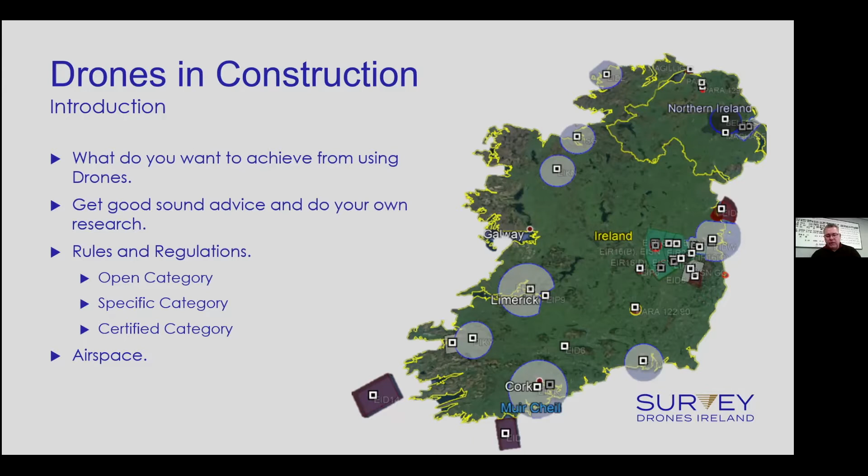The other side that everyone keeps coming about is data protection and GDPR. Look, as I always say, GDPR and data protection works both ways—it's not just one way. It'll never be just, let's say, the individual coming up to you and saying, 'hey, what are you doing taking a picture of me, who gave you permission to take a picture of me?' There's a two-way stream with data protection.

Just on GDPR—during the drone instructor courses or training courses, we only touch on data protection, we only touch on GDPR. Realistically, you should go down the road of having proper legal advice when it comes to data protection and GDPR.

The different categories we're dealing with at the moment are the open category, which is subdivided into A1 and A3. This course is done online, and you need to do it—any drone you have, you must complete this online course. If the drone has a camera and the ability to capture data, under the new EASA rules it clearly states that drone must be registered. You're registering yourself more so than the drone itself.

Once you do that, the A1, A3 category course is free and online. It's €30 to register your drone, and then after that you go and do your A1, A3. Then if you want to fly closer to people, within 5 meters of them, you need the A2 category, and again that needs to be done through the training schools.

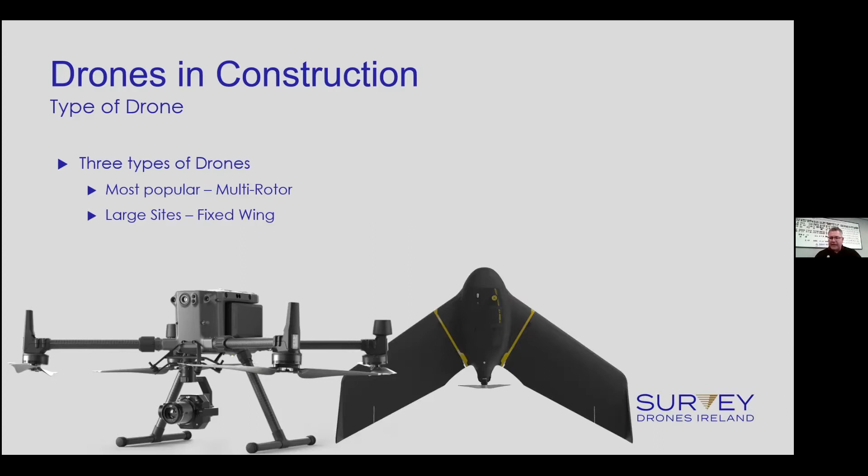The difference between the multi-rotor and the fixed wing is you need kind of like a landing strip for the fixed wing. You don't technically need a landing strip for the multi-rotor. She goes up to where she is and comes straight back down. The fixed wing has to come in at an angle. Now, even though the angle is very steep, you still have to have at least 50 meters by 50 meters at a minimum. The multi-rotor can take off and land inside the construction site very, very easily, whereas you cannot take off and land inside a construction site with a fixed wing. Fixed wing, technically speaking, not good for you, okay?

So you're kind of saying to yourself, okay, right, that's exactly what we need. And then she comes back and she lands. Now, I have great experience of all these three aircrafts. I like every single one of them. But with the VTOL, there's something unique about it going up, transitioning into a fixed wing, and then disappearing into the horizon. And I don't mean that, but you know what I mean? You come back and you collect it, and she comes back into land. Remember, visual line of sight at all times. That's most important. Okay, so that's roughly the type of drone that you're looking for.

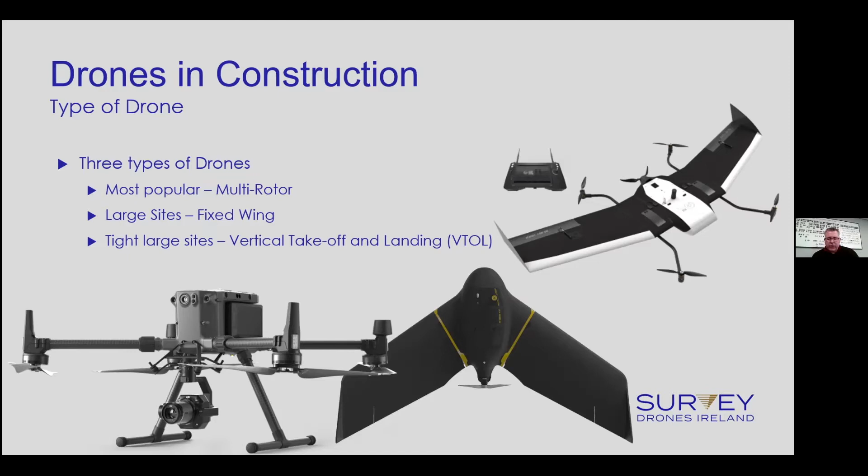Now, as I say to you, you may not be willing to spend money on the drones because each one of these is quite, I won't say expensive, but they have a lot of money behind them. So you need to say to yourself, okay, what are we going to spend straight out?

Don't go cheap, I can't stress that enough. So when you are looking to do this whole drones in your construction site, you need to go in, all in and fully commit. So training is the most important factor here, it's that simple. Training is in my book very, very important, because what happens is a lot of people go down the road of training and they just go, yeah, we'll get the training, we get the course done, the 2-day ground school course, that's fantastic. And then we go off and we get a flight exam and then we're quite content with that. And then, do you need actual flight training? No, we're okay, thanks very much.

And that's where companies let themselves down, right? There's no point in you just getting half the product. Go all in, commit yourself and say, right, let's go down the road of training. Now, I know that's kind of a sales pitch, and I know it's come from school and that's everything else. But no, deep down in my heart, I really believe training is so important. A lot of people let themselves down with training, okay? So the 2-day ground school is something that we offer. The flight training we then offer, and then the flight exam. Now, I cannot stress this enough. The flight training, there is the core ability for you to be able to fly safe, okay?

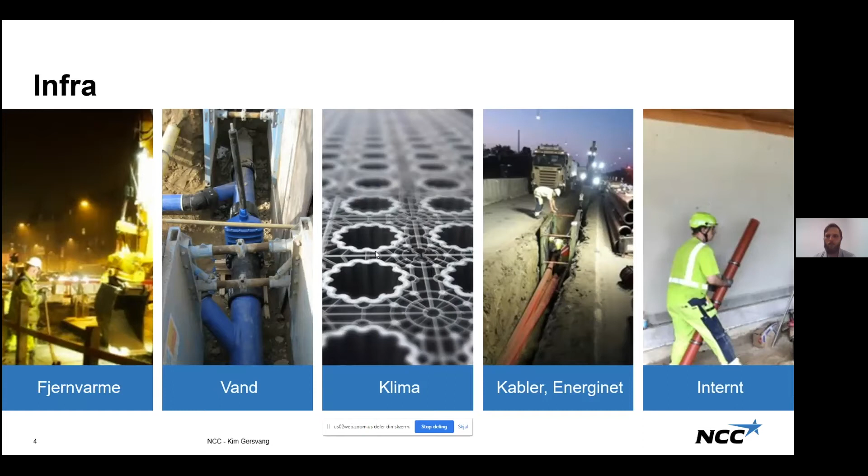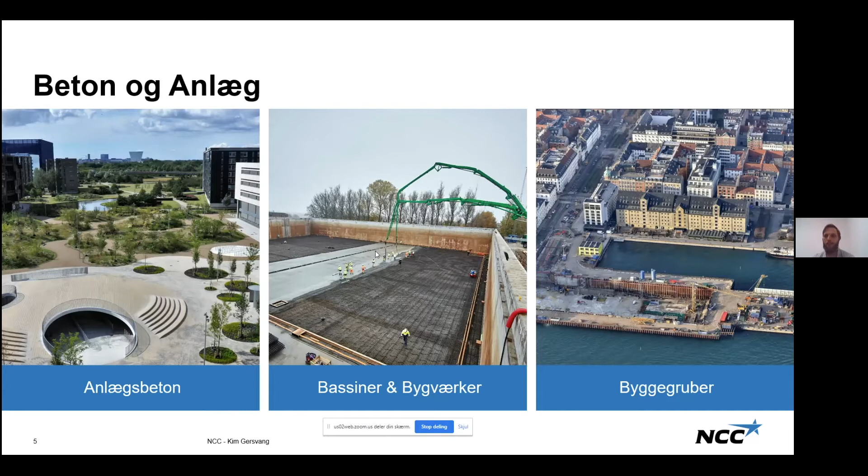Specifically in my small department, civil engineering Denmark, we have 2 main business units: infrastructure, which is district heating, water, climate change preparation, all kinds of energy; and our concrete or civil works department, which is where I do most of my work—all kinds of concrete, like this beautiful school here on the left, basins for fresh water, construction pits, and this one in the middle of the harbor. All kinds of things, we do a lot.

So we got started with drones in 2015. It was my good colleague who saw an opening because he was sick of paying the bill for the small propeller airplane that came over the sites at 200 meters and took a small picture, and he paid a fortune for that. So he went to the boss of the site and asked, maybe we should buy a drone and take over this ourselves. So those two pictures on the right are actually from his presentation after he purchased the drone.

And when they started doing this work, what they were doing was a very low bar - five minutes before their meeting, they sent up the drone and took a picture, then printed it on a small A3, and brought it to the meeting. And already there, it was huge value, because having a straight out picture of how reality looks five minutes before you go into the meeting is the best.

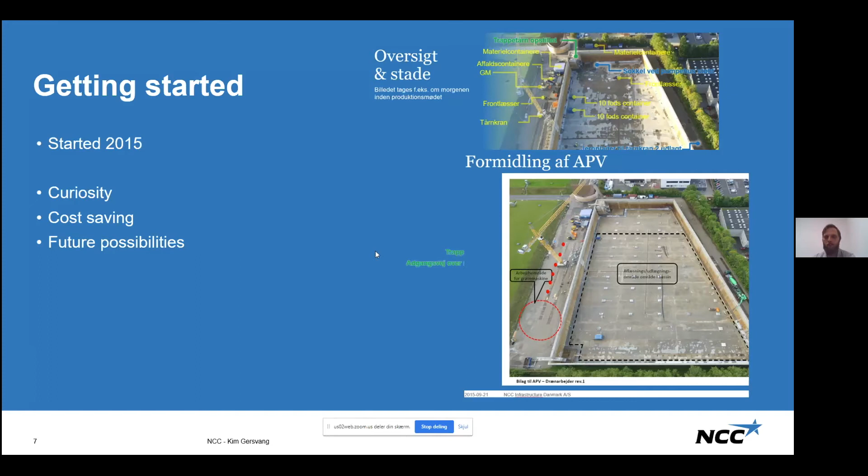So from a purely cost-saving perspective, they already won with the drones. Slowly we realized that there was a huge potential in working with these drones. And one of the first things we bought was Pix4D, which is a great tool, and we still use it.

And we started buying more drones. We started out with a Phantom, DJI Phantom 3, which is old by now, and we went on to buy Phantom 4 Pros, which is still one of our main workhorses. And we started doing all our quarries, all our industry divisions, all asphalt and all components you need for that. And we started doing pretty much all new larger building sites that are not in very restrictive areas, like next to helipads in the city and stuff like that.

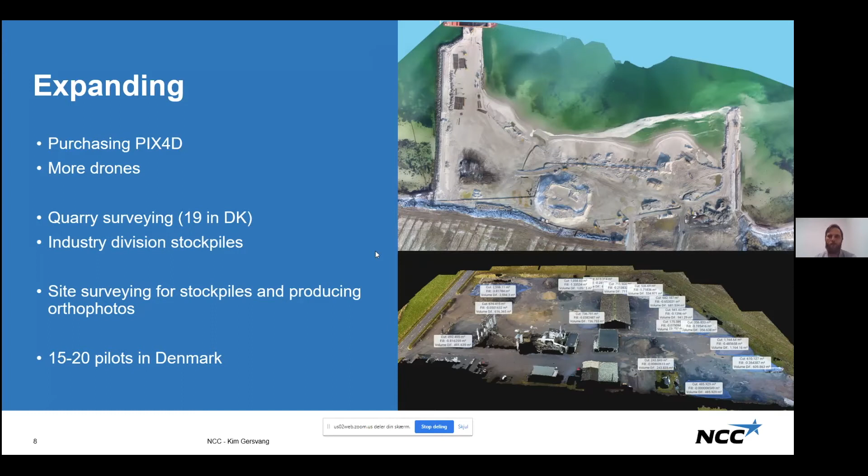And over the years we lost a few employees not long ago, so I'm not sure if we still have 20, but we at least have 15 in Denmark and many more in the Nordics.

And then what we had was fairly accurate within one flight. So we had the accuracy of measuring our stockpiles and everything in good internal quality - like we had a 2%, I think, volume inaccuracy. So how do we get this better?

We want to see how our sites develop. We want to measure everything basically. So how do we do that?

We upscale. We start buying GNSS rovers to put down ground control points. And for those who don't know what a ground control point is, it's just a known location in the world that the drone can take a picture of, and then we have that interconnect between the drone's location and its location in the real world.

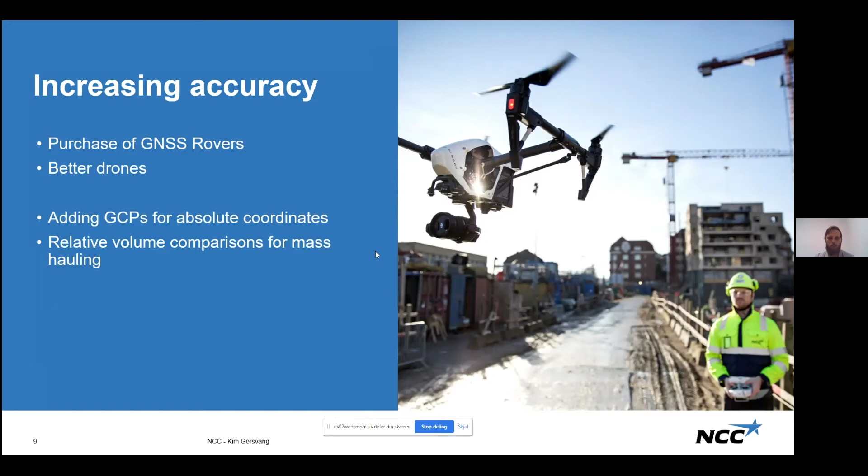And we started buying even better drones. And specifically for our spotlight today, which is a fancy new hospital in the northern part of Zealand.

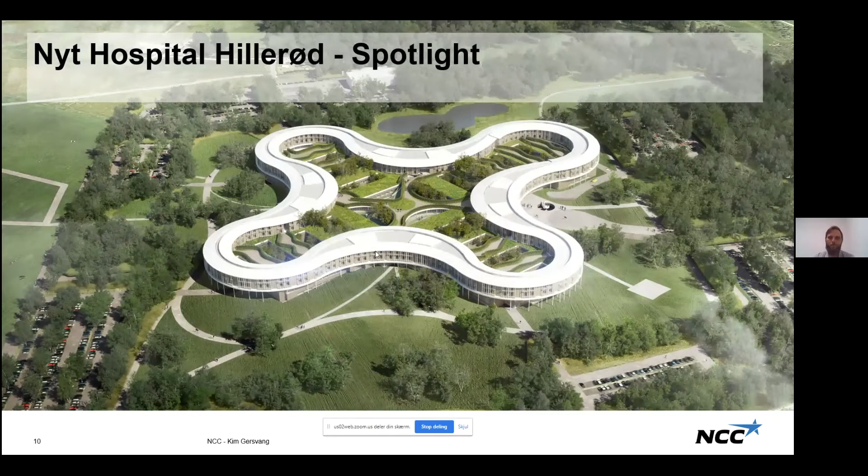We went out, we can take some numbers first. It's a 600 million euro project, 120,000-ish square meters, 570 patient rooms, and a total of 4,000 rooms with all the technical rooms and laboratories and everything.

I'm not gonna try saying that name of the Swiss architect, but they did a collaboration with the Danish architect team, and we won the bid in mid-2019.

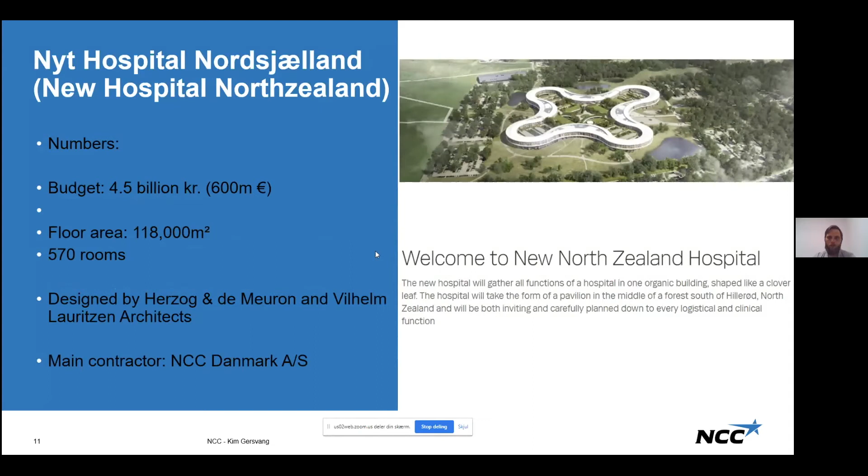It's gonna continue for three more years until it's done with the fit out stage. So for our - let's see if this will start. No, never mind.

We had a goal on the hospital, and it was to improve our accuracy as best as possible. And we wanted to do frequent flights because we know we have a much better hand in the negotiations if we have more data than the others.

So what we went out and did is we bought the very same drone that Wayne was telling you about, the Phantom 4 RTK, which is probably one of the best low-cost drones you can buy, basically. And we went out and bought a subscription also to Wayne's competitor, which is Trimble Stratus, using the propeller platform. And we fly what is called PPK, post-process kinematics, which upscales the GPS quality of the pictures, making for much more accurate measuring and surveying.

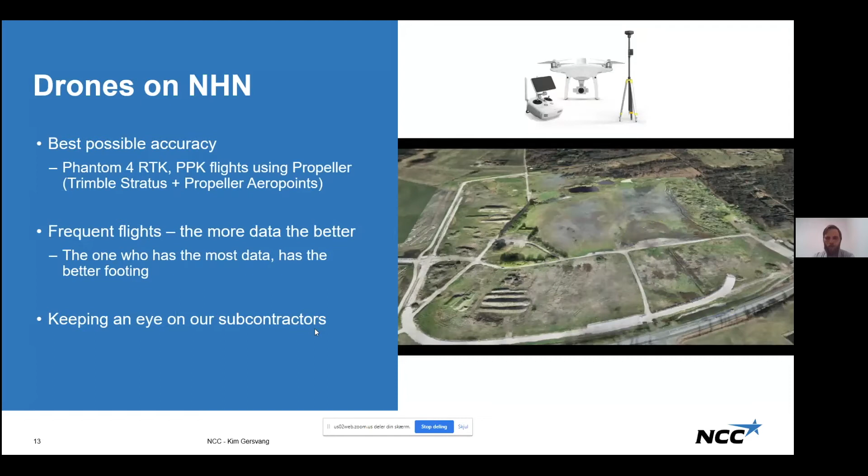And we fly every week, at least once a week. And because we know the more we have, the better - joint venture with one of the bigger earth movers in Denmark called Varslund, which are known to be a bit cheeky sometimes. So the more the better.

When we started on the site, this is a picture from Friday, I think. And you can see there's already about 15 measurements on site from that survey.

When we started, we hadn't actually sold the product to the site. We just bet that they would want to buy it, so there was little to no interest in the beginning. It was pretty much us starting to collect the data. The first ones to move on it were the surveyors, because they run around out there all day, and if they could get an accurate reading in the program instead of wandering.

All 700 meters to the other end of the site, then they would do that. Today we have 70 daily users just in our own organization, and we've sold it to both our subcontractors and the building owner.

I saw statistics the other day that we had more than 3,000 unique logins in the last 6 months, so we have a lot of activity. They use it every day. I can't walk through the office without seeing it open on at least a few screens, just because they're checking something, doing a small measurement, or checking an area for how much they need to order for next week, or things like that.

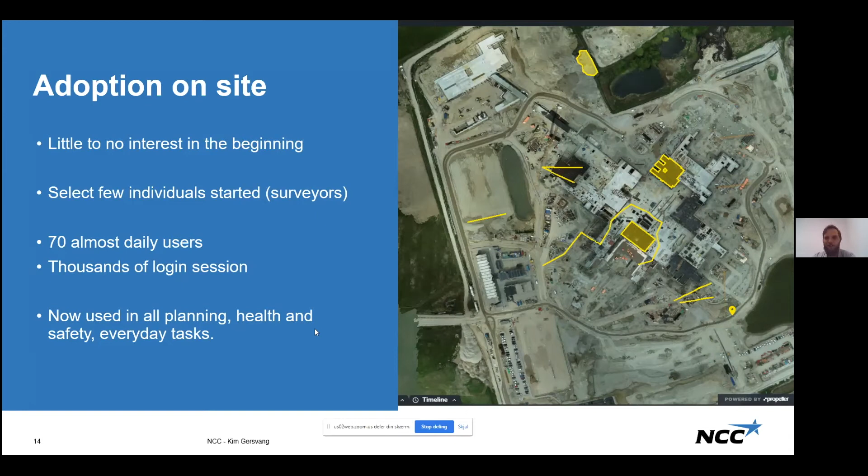We use the Propeller platform, and in this platform we get these ortho photos, which is amazing for planning. We can put in overlays using actual models. We export to CAD and DXF, upload these, and they get put into the correct system, and they can measure directly on them. They can see the progress. They can do everything.

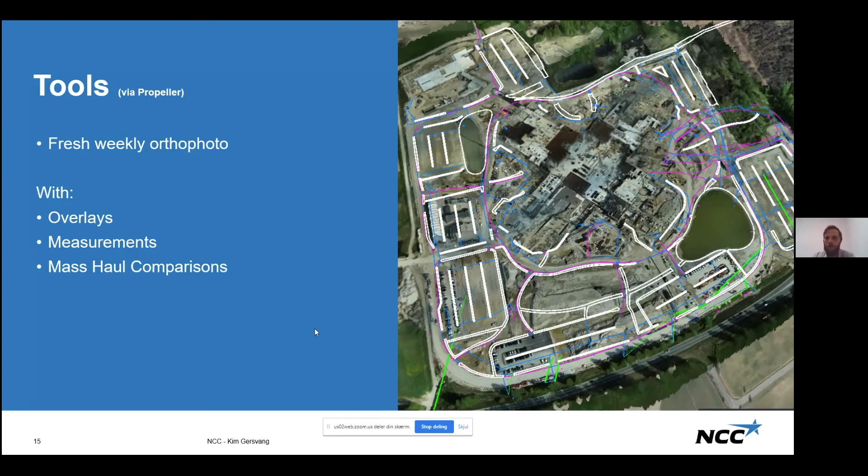We can do mass haul comparisons to see how much has moved since last week.

So far, the only limitations we run into are rules and regulations. It's been a complicated start to the year, I would say, and we are eagerly awaiting the new drones coming from DJI with the CE marking. We're waiting a little because we want to buy the exact drone Wayne was talking about, the Matrice 300, because it has both a super high quality camera and it's slightly more weatherproof than ours.

And if we went all in, we would buy it with the L1 LiDAR solution, so we can see through the vegetation, because whenever we come on site and there's green all over, we can't see the real surface, only the planting. One of our main issues always is not enough data.

I would actually like to fly every day. My wishful thinking is that I sit in the office, draw a yellow square on the computer screen, and say fly, and it goes up to map that specific area because they just finished digging, for example. When I come once a week and fly, they've already dug out and filled it back up, so I don't get the measurement.

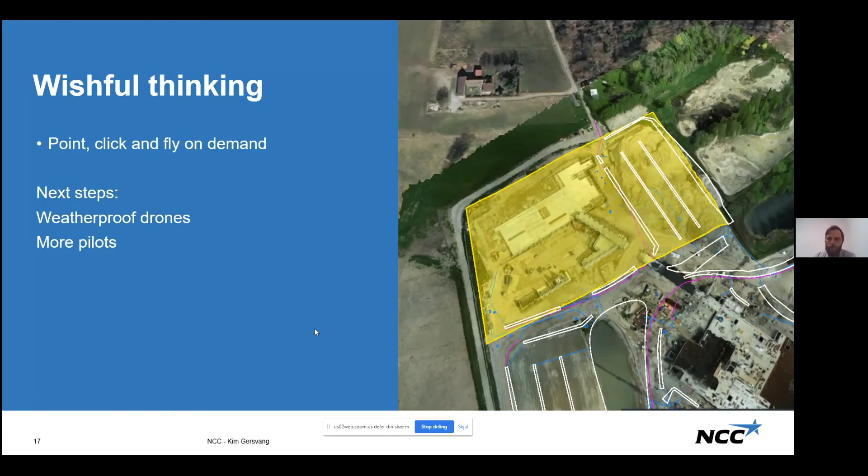Any questions? Thank you very much, Kim. That's fascinating - quite a huge project you have on your hands there with the hospital. Good work. There is one question in the chat from Stephen, one second.

Stephen is asking what are the major benefits of the increased accuracy. When we used the old version of the Phantom without RTK, we'd have an accuracy within plus or minus 4 inches, or 10 centimeters, something like that. It's perfectly alright, and it's a relative accuracy - basically everything is perfect in relation to 2 points on the map, but if you relate it to a previous survey, it may shift 10 centimeters. With the new one, we get an accuracy below 2 inches, or 5 centimeters.

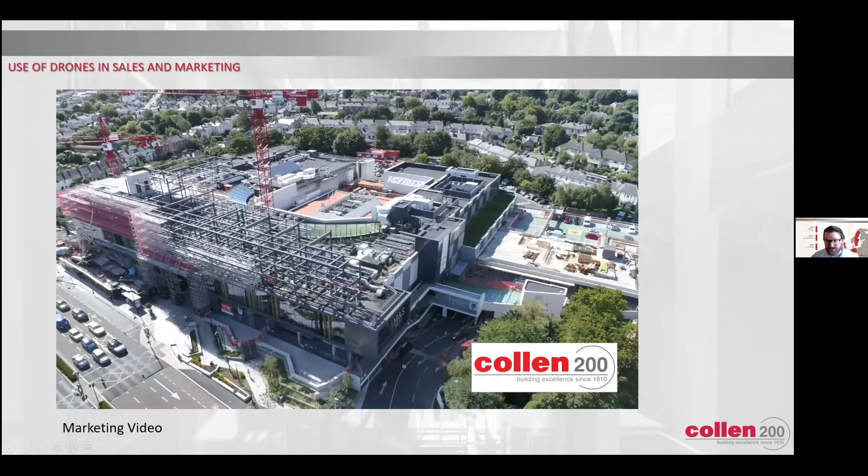Sorry Stephen, the volume is very high on that, it's a bit hard to hear you over it. You might be able to turn down the volume on the video a little bit. Just kill that now. Yeah, I was afraid something like that would happen, but that's an example, sorry about that Vinny, I know the video is good, it's just the volume on the volume on the. No worries, yeah, so I suppose the long and short of it is, let me just see if that's going to work better. Any better?

It's grand if you're not trying to talk over it. We can't hear both, but if you want to play it away there, we can hear, we can see it here. I'll tell you what we'll do, we'll leave it alone because I have more things I need to talk about.

This project, the Frascati shopping centre, is inherently a very complex job. We're building apartments on top of a live shopping centre that we had already extended and refurbished. You can see the power of the drone footage in this scenario - it shows the job is difficult, logistically complex. That communication piece alone for us, with stakeholders, the people in the apartments to the right of the job, and the houses behind, really helped us convey the difficulties we were dealing with, and actually helped smooth out some relationship issues we were having.

On to the next one. One South County in Leopardstown. This is a time lapse that we did, probably a mashed together series of drone footage. So.

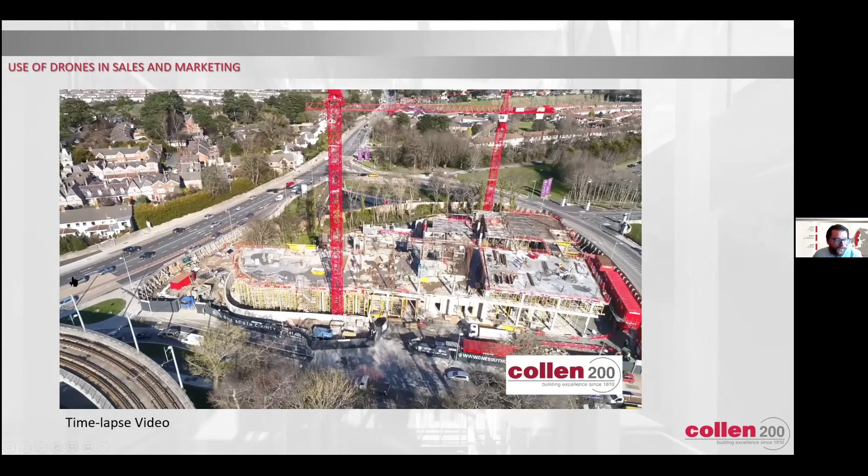The point there is to show progress and communicate progress with people that aren't necessarily construction orientated - clients that aren't on the coal face and don't understand. There's nothing better than imagery to show that kind of progress. That's what we achieved by using that. In that scenario, we effectively did a time lapse by mashing together a number of different staged drone flyovers, and it was a very powerful communication tool.

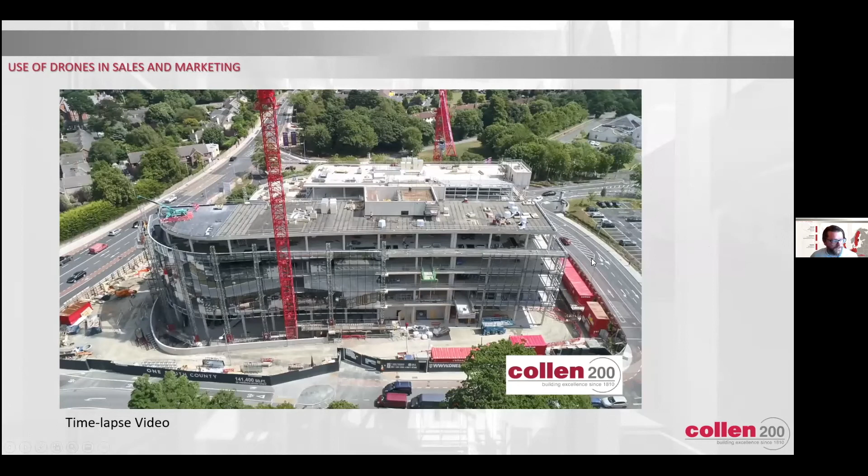I'll just push on to the next topic now, because I think that sound is probably just very distracting, and it certainly is for me.

The use of drones in project reporting and communication - what we are doing at the moment is, once a month or once every two weeks, depending on the complexity of the job and the budget sometimes, we are doing a flyover to show progress. The guys on site themselves are getting a massive benefit from it, to see the tangible progress they're making, and it's kind of a motivational tool for them, but also they're actually using it to adjust access plans and logistics that perhaps aren't working as well as they could, where they're seeing more space that they mightn't actually see without the aerial view. That's really helping us a lot.

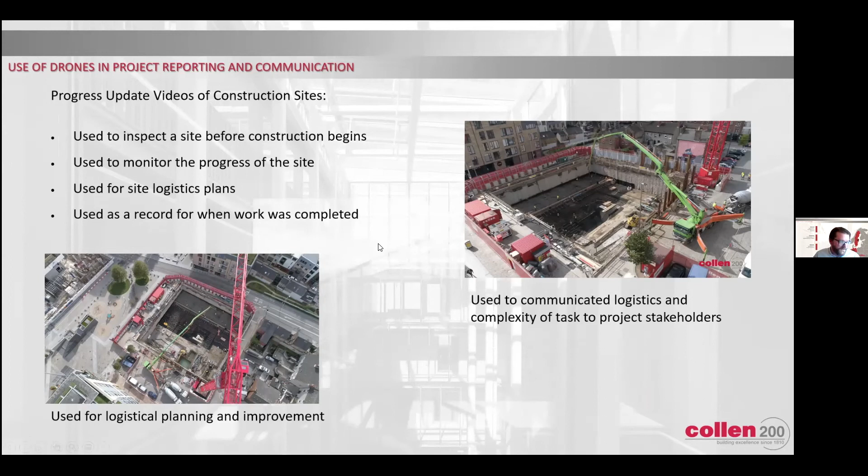Another ancillary benefit we're finding is that it's a great tool for keeping records. Occasionally a query will come up - did that piece of structure go in, or how was that formed? You can actually go back and show the engineer or the client's team member that it's there. Not to make a major thing of it, but it is something that has solved quite a few problems for us at the sign off stage on jobs, on a number of different projects. You'd be surprised how many queries you get like that - you'd imagine these things would happen as a matter of course, but it's proven to be helpful in those types of discussions.

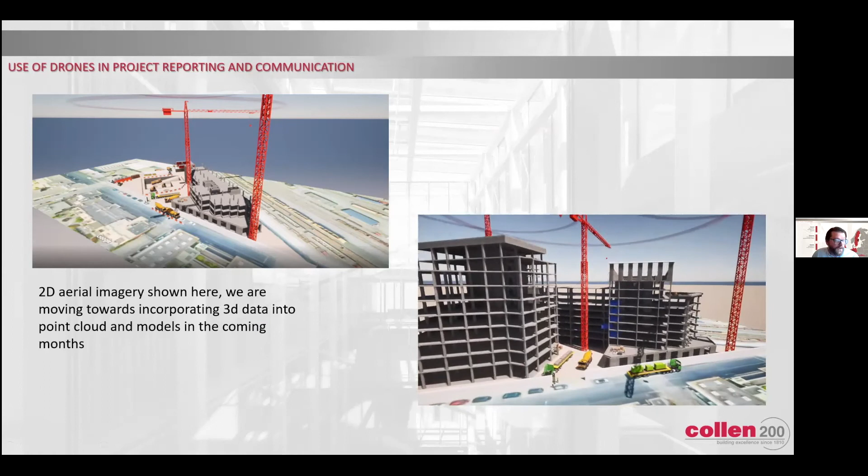I suppose more at my end of the business, the bidding and proposal side of it, we're starting—you can see they're effectively Google Maps images there, and they're 2D—to incorporate three-dimensional imagery now into our bids. We're not quite there yet, we're early days with it, but it's heading in that direction. We're giving clients an overview to help them understand complexity and logistics on the site and how tight a particular job is. This is what we're doing on a regular basis now for bids.

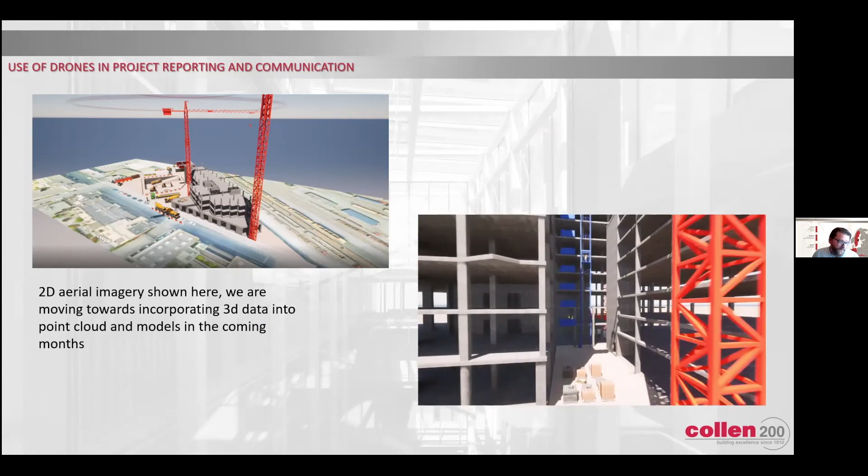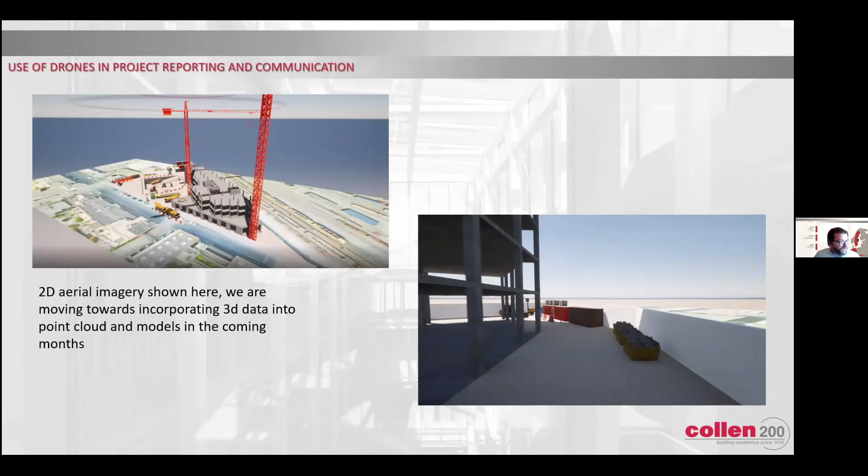I think the introduction of three-dimensional aerial data will only enhance this to a significant level. It's something that really speaks to clients and stakeholders, and we're starting to do this on a regular basis now as well. The terminology from my BIM team is that this 3D data will be incorporated into the point cloud and models in the coming months. We're not quite there yet, but we're heading in that direction. I know other people are already doing this regularly, but for us it's very exciting.

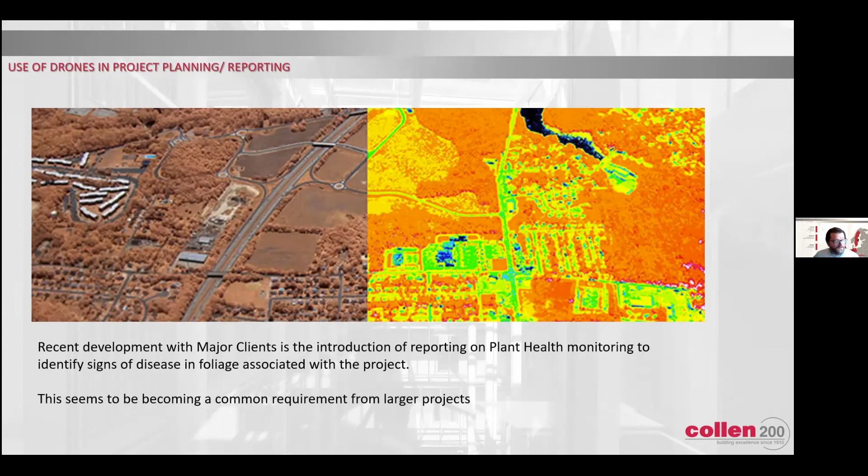It's something we're seeing more and more, particularly with our large hyperscale data clients in the Nordics, in Germany, and more recently in Dublin. It's another aspect we didn't really see coming, and now it's become the norm for some of these big tech giants, which we're very happy about, because we have a big focus on environmental management and compliance. So that's great.

The other thing we're seeing, which leads into my earlier point about 3D photogrammetry, is that we have clients looking for us to provide elevational survey data. We're also using it ourselves on jobs at the early stages, particularly design and build, where we're competitively tendering, to try to get angles in respect to cut and fill exercises. Collen aren't really a heavy civils contractor, we're more building, but there are certain aspects of our jobs that have a significant amount of cut and fill going on. We're seeing possibilities, and we're starting to see some benefits in Sweden for sure on that front.

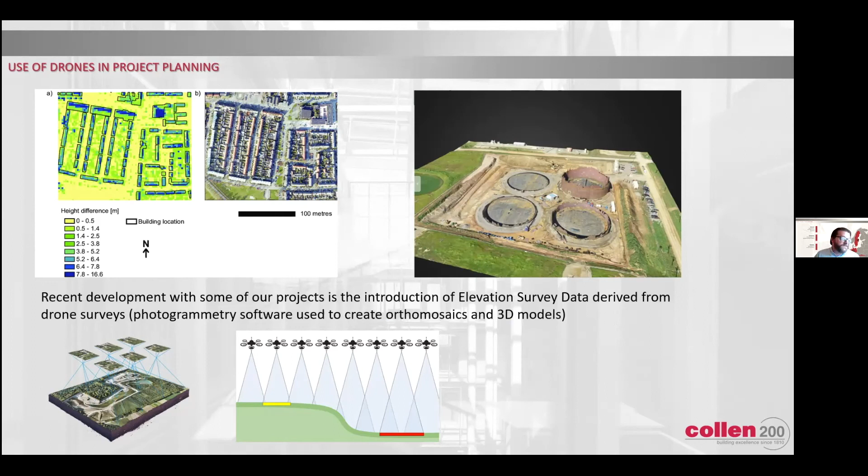So the next steps for us are in a few different areas. One thing we're looking at is safety monitoring. There's always a stage in a project, early or late, when it's difficult to access certain areas that aren't designed to be accessed on a regular basis. So there's the concept of maybe doing remote inspections using drones.

It really arose for us during COVID. Some of our guys were toying with the idea of getting an operator on site to inspect things and make sure everything was in order after bad weather and stuff like that. So we started doing it on a couple of jobs that were in flux when the first lockdown happened. It certainly allowed us to spot certain problems and send out crews to solve them—things like loose materials on roofs, floods near railway lines, that kind of stuff.

The other thing is we don't want to be putting our staff at risk. At my end of the business, we do tend to go out to jobs, old buildings sometimes, and you have to climb up onto a roof occasionally to look at it, and you don't really know what you're standing on. You can't always get a guarantee that what you're standing on is safe. If we have doubts, we'll bring along a drone, or call in our drone operators and ask them to do a flyover first and get in reasonably close. You can't be touching and feeling, especially in conservation jobs, but this is a nice compromise when you're worried about the substrate you'll be standing on. So that's something we're looking at as well—not really started doing it yet, but it's coming in the coming months.

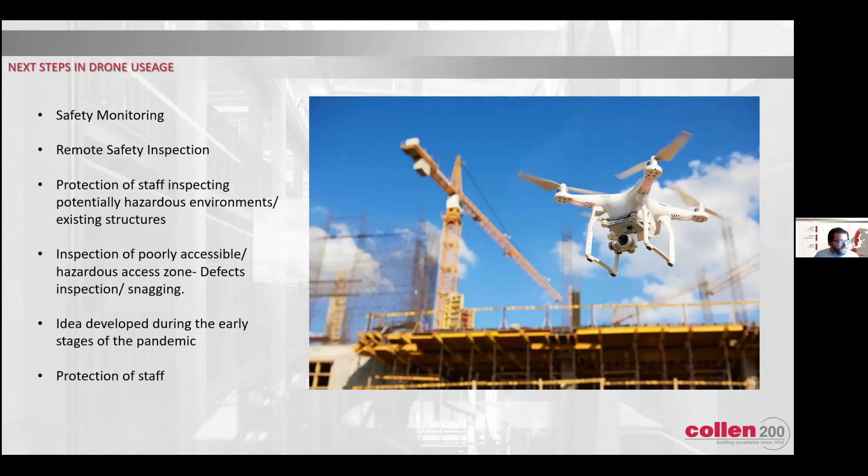I suppose the other thing is that we're starting to use them for condition reporting as well. There's always parts of a job, if you're in the city centre, where you can't really get to and see what's going on, looking at how buildings interact with each other. So we're feeding into the condition survey piece as well - maybe not necessarily getting up in a basket and looking at something, but actually getting the drone up there to look at it and seeing what's going on.

Again, as mentioned very briefly earlier, the BCAR building compliance piece - confirming that work was done, confirming that work was done in the correct sequence. It's something that's come up once or twice in the recent past, and we're definitely seeing a benefit there. We can show a video of the work physically being done, being poured, or being fixed in place. That's a massive benefit for us as well.

I suppose quality walkdowns and augmented reality - certainly for us, it's an aspirational thing at the moment. We're not quite there. We've done a bit of it in Dublin Airport already, at the early stages, sort of clash detection. We used a bit of augmented reality up there and found it very useful. We found, in that scenario, conveyor belts that had steel columns going through them. So it does work. We're trying to look at how we would incorporate drone footage into that whole process and how that would look.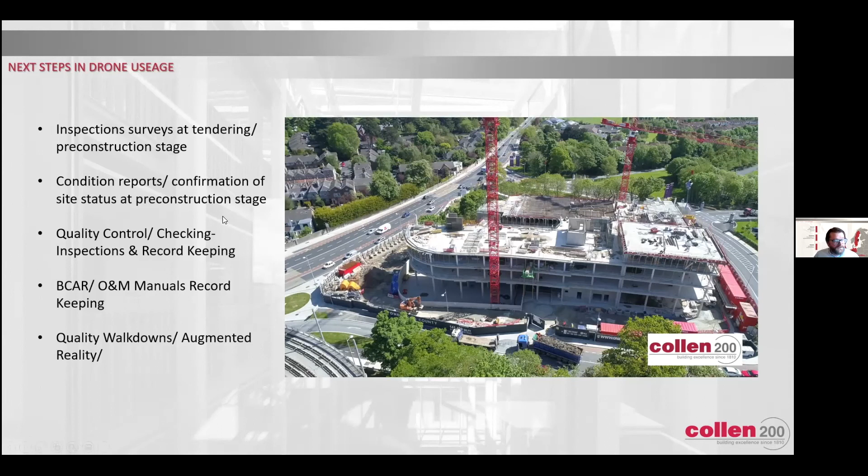And it's all data - if you can get it into the point cloud, it'll work. The guys are talking about using the goggles and all to make that happen. So I think it will happen, because we have a very strong BIM team and technology/IT team, and they really are all pushing towards maximizing the benefit of technologies like these. So that's where we are. We're not quite there. I'm sure there's people maybe on the call that are a bit further along than we are, but that's kind of a practical approach to how we're using drones in our business.

So definitely we're starting to see benefits in some of our Swedish projects for one of our large tech giant clients, with respect to land surveying. I was curious about Kim's presentation earlier, because he did mention the accuracy thing, which is one aspect we're working on at the moment. So I might touch base with him again after the call, if he doesn't mind.

But certainly we have benefits, and we have used it to demonstrate volumes in a cut and fill exercise, particularly on a job where we were blasting rock and stockpiling it, separating out the rock, the subsoil and the topsoil, identifying the quantities, and what we had to do when putting stuff back in to remediate the ground.

So there's opportunity in the drone space, the big thing for us, to significantly reduce technical labor requirements that are in shortage. Like engineers, there's not enough engineers out there at the moment, there's not enough surveyors out there at the moment. So we can take a bit of pressure off these people with tools that allow them to do more work, produce more work, whilst maintaining accuracy. That's a massive focus for our team, and I'm sure a lot of other people as well.